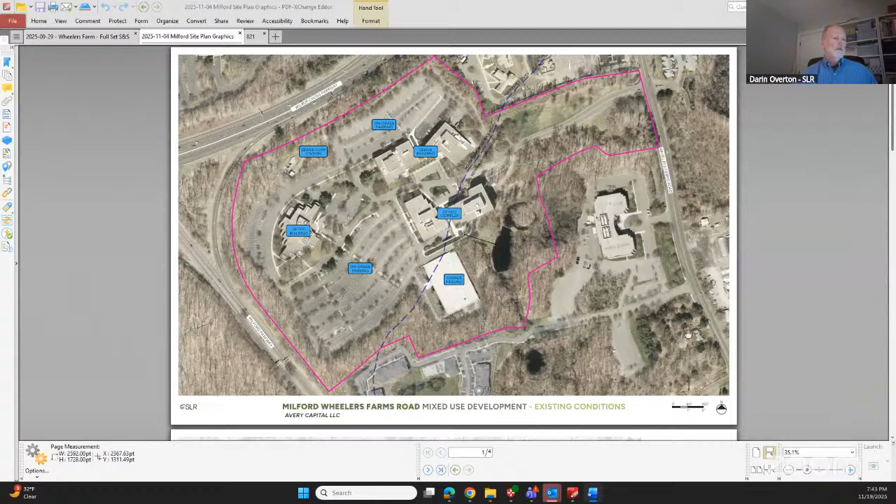corporate office park. So the next sheet I have is a proposed development rendering of the site, which shows the proposed changes to the development. It's a redevelopment of the office park into a mixed use with multifamily, residential, and age-targeted uses.

So we have a building here which replaces one of the office buildings. Actually, there's 2 office buildings here that are tied together by a corridor that have parking that utilizes the existing parking garage, which is proposed to remain. So this is the 150 age-targeted building that's proposed to replace those 2 office buildings that will be removed as

part of the project. And then over on the western side of the site, we have the proposed multifamily residential housing. And there's really kind of 2 quads to that development. So I'll zoom in a little bit here. We have 2 proposed L-shaped buildings that are 63 unit buildings. We have another 62 unit building.

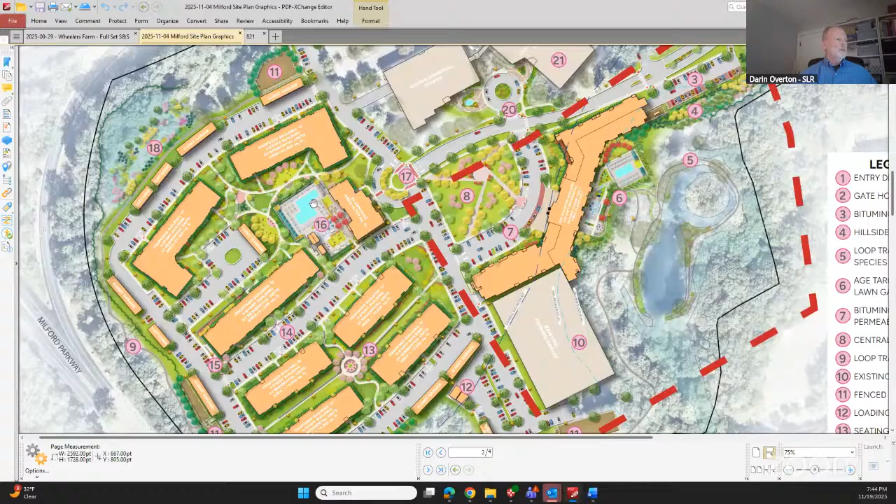And then there's a clubhouse that sort of closes in the quad. And then on the interior part of that quad, there's walkways. You can see the proposed pool and amenity spaces behind the clubhouse. The second quad to the south has 4 multifamily buildings. They're all 44 unit buildings.

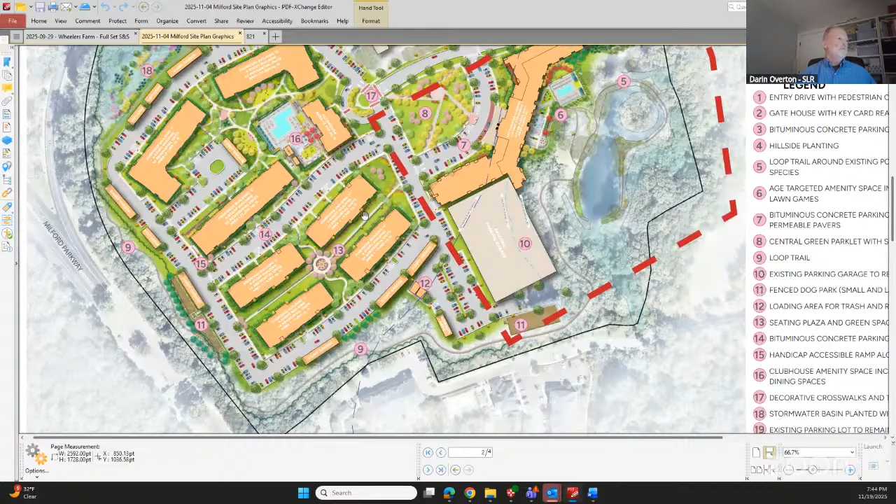And then there's kind of a smaller gathering space in the middle here with connected walkways to provide pedestrian access throughout both the multifamily and also connections throughout the site to the office buildings as well as the age-targeted building. Each of these has adjacent parking spaces that provide convenience for access for the new residents, as well as the use of the existing office buildings.

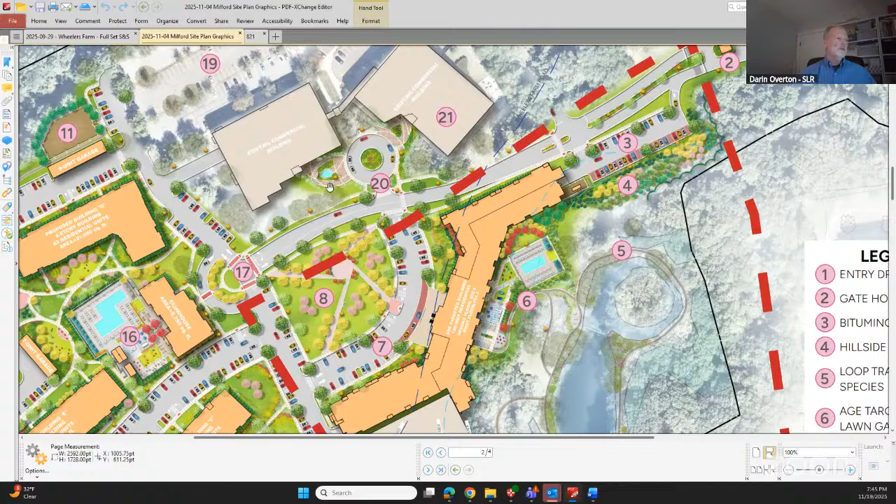As part of the 2 office buildings to remain over here in the northern part of the site, the northern parking field is remaining the same, essentially unchanged. We are providing some improvements to the access to provide vehicular access and drop off at the front door and some enhanced landscape treatments for the entrance to those 2 buildings.

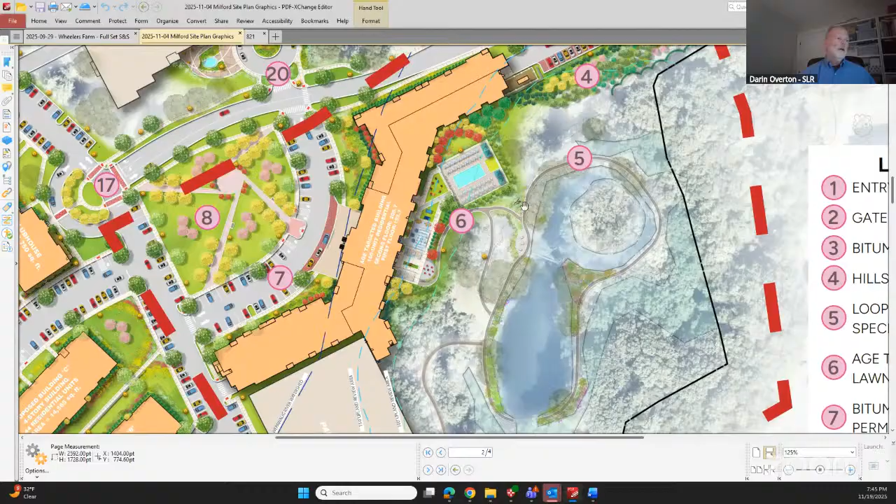The age-targeted building also has an amenity space on the back side of it. The amenity space also has a pool and several other outdoor eating and amenity spaces, and it overlooks the existing pond on the site, which has a trail system around it that exists, and we're going to enhance part of that as part of this project.

There's also a central green, this item 8 here in the middle, kind of a public space that ties all the uses together. There's also pedestrian connectivity through these areas with crosswalks to basically connect all the uses. There are a few dog parks that are proposed for the new residential uses. There's one over here, 11, another one here, and then another one here.

And those are connected by a nature trail that loops around the multifamily. It comes through the south side of the site and also connects in with the age-targeted building. And then there's pedestrian connections across the roadway network to the office buildings that are proposed to remain. So we have parking distributed around the site.

As part of our work, we did a shared parking study. We looked at the various peaks for the different uses, and we sought to not overpark this. Because the office building and the residential have different peaks, we sought to optimize the parking to provide the right amount of parking, not over or under park it.

And we believe what we've provided at 1,409 parking spaces with 126 potentially in deferred areas that we're not building at this point, we believe we've adequately provided parking and distributed it well throughout the site for each of the uses.

I'll just go over a couple more, really kind of engineering aspects of the plan, stormwater management and the S&E plan. And then I'll turn this over to Megan. For stormwater management, we've done a full hydrologic analysis of the site. We've looked at both watersheds. We've looked at trying to maintain the water where it goes now in those two watersheds.

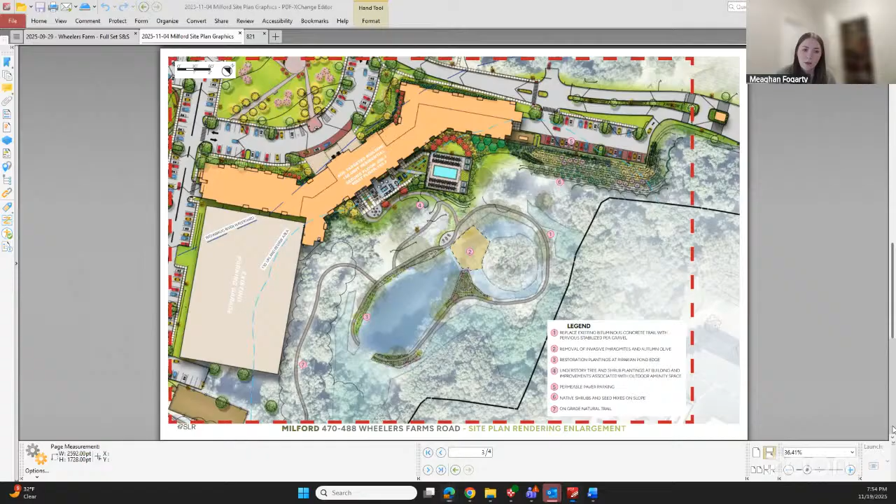Shifting now to the proposed activities and any potential impacts. We again want to emphasize that no direct wetland impacts are proposed. The regulated activities within the 150-foot upland review area comprise a little over 71,000 square feet. And that includes portions of the age-restricted building, as we see here, permeable parking, as well as grading and landscaping and the restoration activities around the detention pond itself.

The deteriorating paved pathway around the pond will be removed and replaced with stabilized pea gravel, which is a more permeable alternative that will serve to enhance infiltration around the pond. And we will also be removing invasive vegetation in and around the pond. As you can see in orange there, there's autumn olive, some pretty tall, dense stands of it around the periphery, as well as Phragmites australis inside the pond in that one polygon, sort of to the northeast there.

And in their place, we will be planting a variety of native wetland plugs and shrubs around the pond to create a more natural littoral shelf. In its existing conditions, the pond is primarily mowed lawn right up until the edge of water, limiting the functions and values the pond can provide. So we're looking to enhance that there and replace and promote with native vegetation any areas that the invasives will be removed.

As you can see in this graphic as well, there's a dashed red line where the age-restricted building and amenity space is proposed, and that represents the limits of the existing hardscape that encroaches within the 150-foot URA. And so as you can see, we tried to keep the hardscape of the design limited to that general footprint, and we're fairly successful. Everything beyond that, we use strategies such as the permeable paved parking spots, as well as a pretty heavily planted hillside upland area with a lot of native and wildlife food source producing shrubs, as well as a native seed mix in that area.

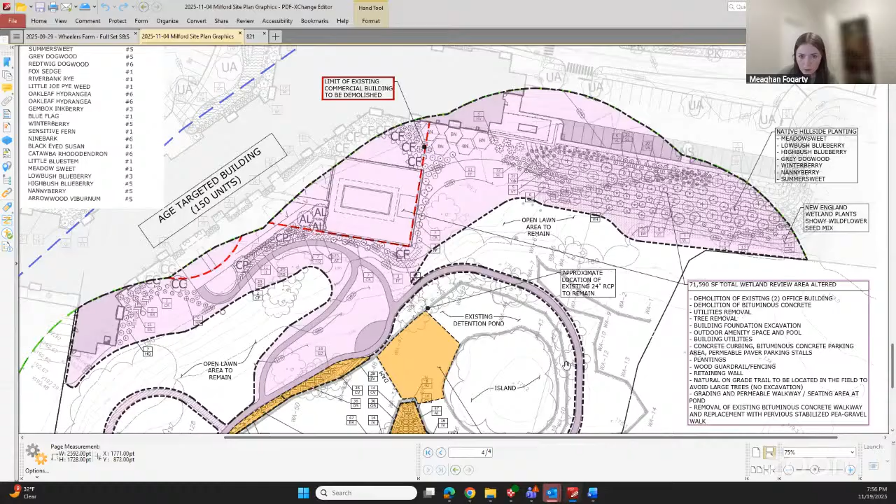And the trail, apart from the area that's encircled in the pond over to the west, the nature trail that Darin was speaking to, instead of a surface material such as pea gravel or pavement, we chose to keep that on grade and natural as possible. We talked about possibly having some non-dyed natural wood chips in areas where we might have to traverse a steep slope, because the trail will be field sited to avoid clearing of any large trees. So it might shift a little bit from the proposed condition you see there, just based on tree avoidance.

As Darin spoke to, the sediment erosion controls are in accordance with all applicable guidelines and will serve to protect water quality within the detention pond and adjacent wetlands during construction. And overall, the lack of proposed direct wetland impacts, the adherence to the general footprint of the existing development, and the mitigation activities proposed in the form of invasive vegetation removal, a diverse variety of pollinator-friendly upland and wetland plants, and that replacement of the paved pathway along the pond were really designed and are anticipated to enhance the long-term functions and values of this resource compared to its present conditions.

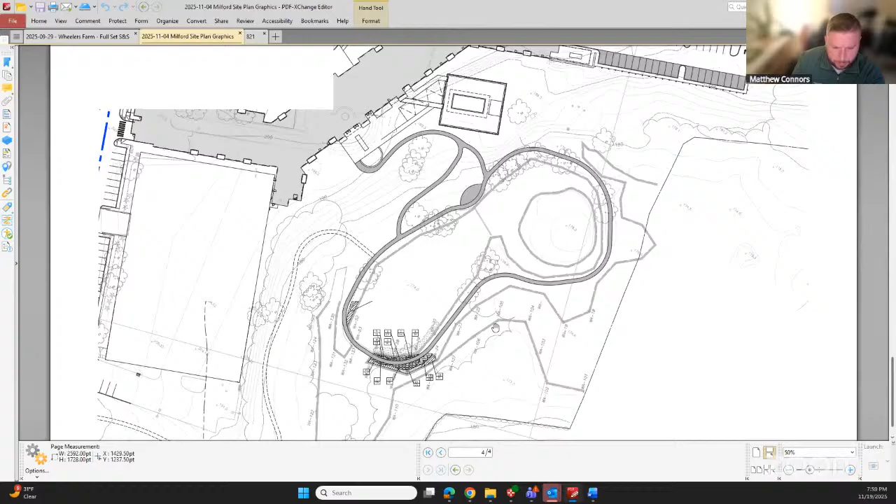Thank you, Mr. Chair. Through you, Mary Rose, is it possible just to emphasize, are there wetland flags? I didn't see any on the map. Are there actual wetland flags on this property? I couldn't see it. I just saw the upland review area marked. So those are the wetland flags? Through you, Mr. Chairman. The exact flags are not shown on this plan. They are on, if I can share, they are on figure 2.

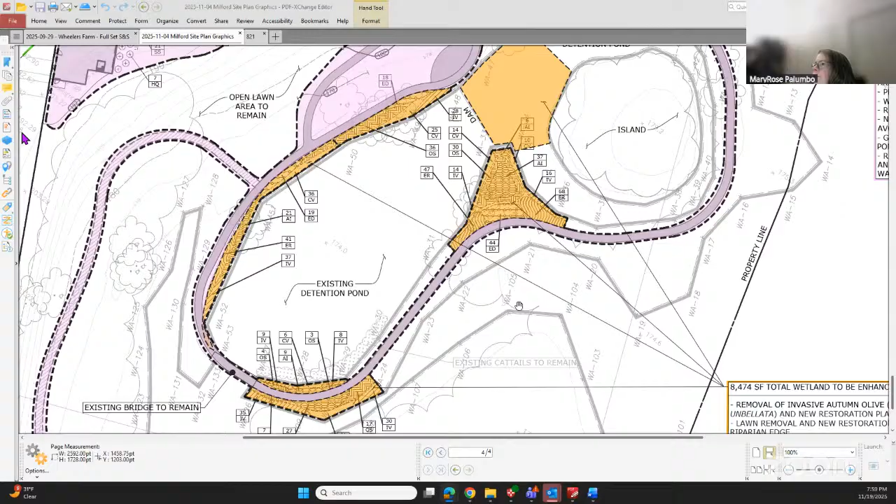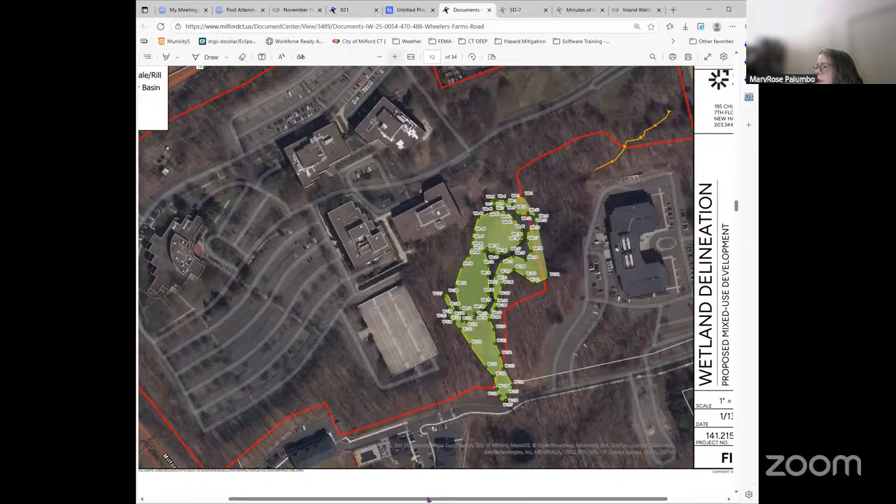Oh, there you go. Go in a little bit. Which is in your meeting packet. And they are on all the drawings in the meeting packet for this area, which is mostly sheet 5. When you're reviewing the drawings, sheet 5 is the majority of this area, and sheet 6 is the bottom corner of the parking deck and the little bottom of the wetland.

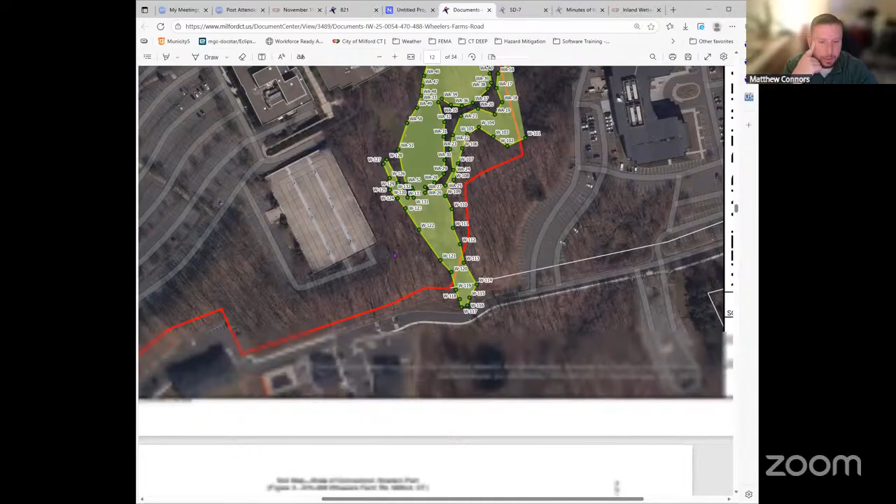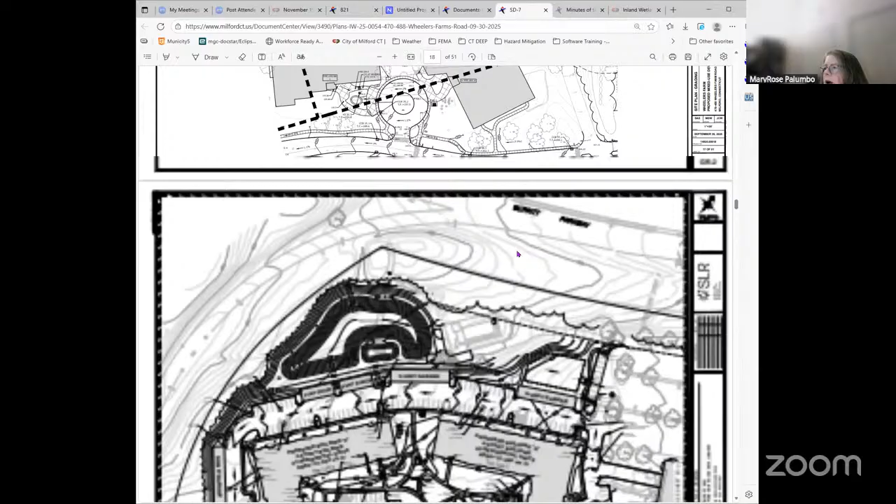And just relative to that question, I was just curious on the dog park. I saw that you guys are going to be using some sort of turf material. Can anybody speak to that and its potential, during storm events, to release any sort of microplastics that can enter the wetland? I'm not sure, Mr. O'Leary, if you have an overall plan. The dog parks are proximal to the multi-family units. The south one I was curious about. Okay. One adjacent to the parking garage.

So the parking garage, keep going down a little bit more. A little more. One more. There it is. I think you need to go up one sheet. Sorry. There it is. The dog park, it's not shown on this sheet, but it would be just to the south of where the cursor is. I don't know why it's not reflected on this sheet. It's in that area. So, yes, correct. Yeah, I had the maps pulled up, I just had trouble orienting that.

Is that in the review area? No, it's not within the review area. Okay. It's probably 300 to 400 feet out of the review area, I believe. Darren, if you could verify that during the conversations. Go ahead, Matt, with your next question. Okay. Thank you. Appreciate it.

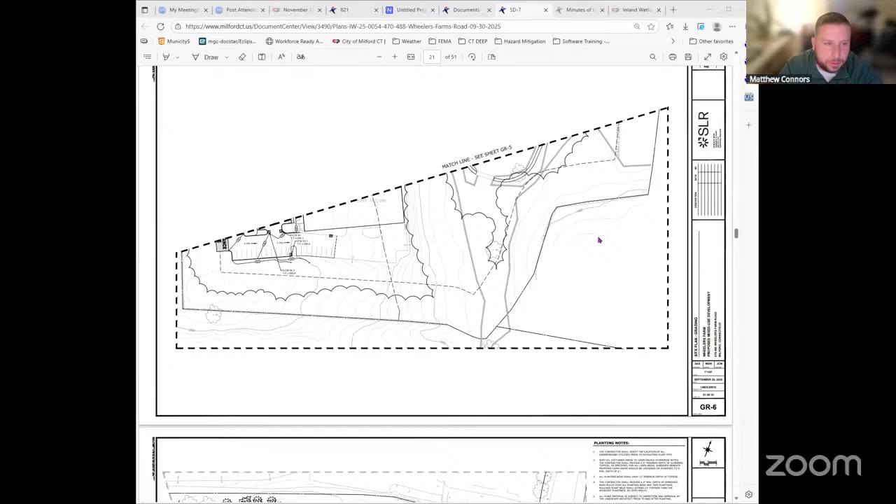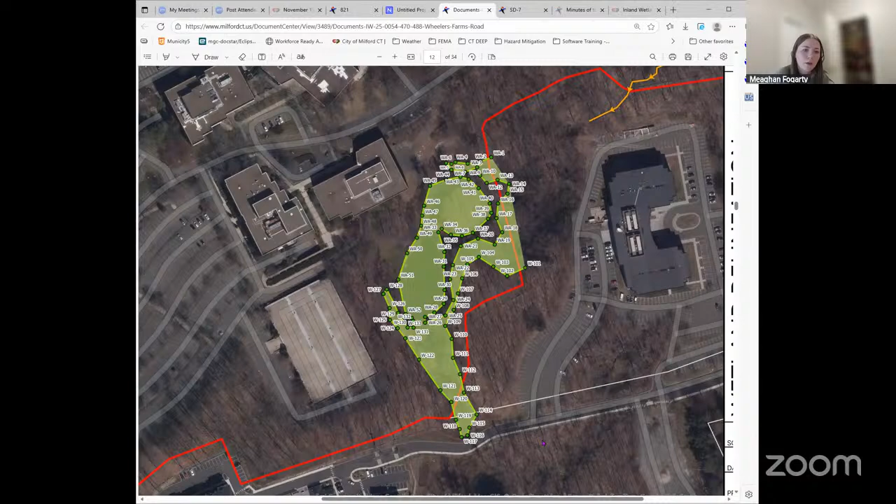My next question was in regards to the Phragmites removal. I just wanted to know what process you guys were going to use. Are you going to mow it back? I know it's really hard to remove Phragmites because of their root systems and how they grow back. Are you going to be using herbicides as well? Yep, that's correct. A wetland approved herbicide is our typical treatment method for Phragmites. It does not respond well to manual treatment, even if repeated over a number of years. So a wetland approved herbicide is the standard there, and that's what is proposed.

And is there mowing as well, or is it strictly the wetland approved herbicide? We don't have an application method included at this point, but from my experience, the Phragmites is located within the water itself, so you wouldn't be able to get a mower in there. But there is a technique called snip and drip, where you cut the stalks individually and apply herbicide down into the stalks, and that's proven very effective and also limits any risk of overspray or accidental treatment of adjacent native vegetation. Yeah, I know sometimes they use amphibious vehicles as mowers for that stuff.

And then in regards to that pond, I know you mentioned it is a detention pond. Not all the water, obviously, but a lot of the water in that pond is coming from the site? Correct. Is there any sort of filtration happening to that water before it's entering that pond as it is right now? So, I think Darren could speak to the actual utility of it. But in terms of the detention area, it's actually split.

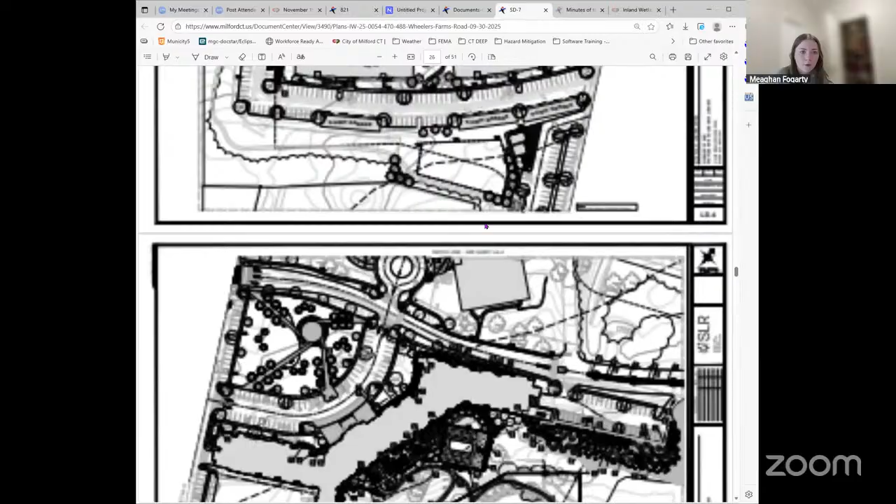Correct. Not that we are aware of. I believe we were looking to dig up some records of the original construction to see. We do know that pipe comes from the parking garage, which is going to be maintained as part of the proposed conditions.

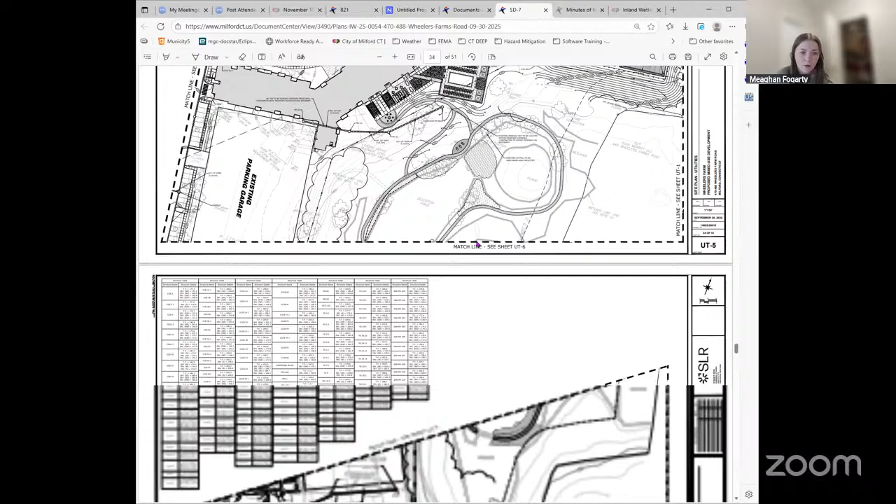And the other thing I will mention is that the littoral shelf plantings that are proposed will inherently provide some level of treatment, as this is intended to be a stormwater basin in its original design. And as such, vegetation along the perimeter goes a long way in sediment and nutrient capture.

So I can add to that a little bit. And Meaghan, I think you're exactly right. In my field walks out there in the summer, that upper part of the basin with the island in it was virtually dry other than right at the weir wall. But there was still a beautiful permanent pool on the western side of the basin, the downstream side. So I think that upper one is a water quality basin that's not intended to have a permanent pool. It's supposed to fill up and appears to infiltrate somewhat.

Along the northern edge of that, there's a 24-inch storm drainage pipe that comes into that upper lobe of the basin with the island in it. That pipe comes from the western side of where the age-targeted building or the existing office building is, and runs over towards the parking garage. We went through all the plans in the facility to try and better understand how that drainage system connects.

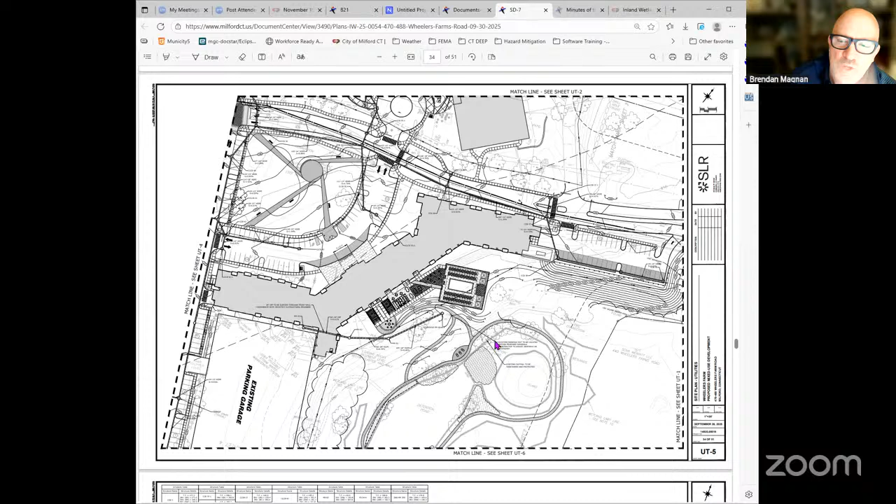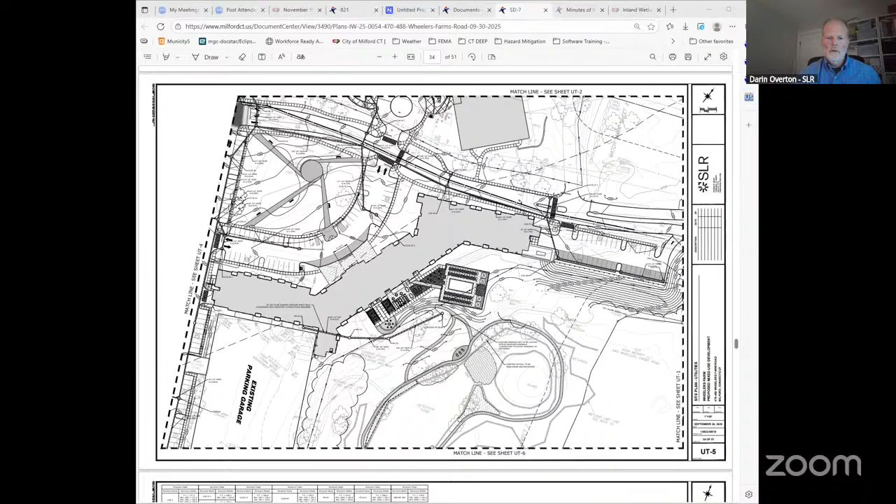Excuse me, Mr. Overton, can you show what you're talking about? Can you take control of the screen and show? Sorry, I want to follow what you're saying and I'm not able to do that. If you can bring up the visual that you had before and just talk us through it, that would be helpful. Absolutely. Let me know when you can see it. Yep.

So this is the upper lobe of the basin, and there's an upland vegetated island in the middle of it. So there's kind of, as Meaghan had mentioned, a moat around here. There's a concrete weir that goes across here that separates the two portions of the basin. As part of the walking path, there's a wooden bridge that goes over the outlet where I believe there's another weir that controls the permanent pool elevation in here.

So this part of the basin, even in midsummer, had a permanent pool. This part of it was mostly dry, other than the area where the Phragmites was. There was still some water pooling there. Just above the Phragmites, right about where my cursor is now, there's a 24-inch stormwater pipe that enters this part of the basin. That comes up to a manhole in this area and then runs west out through the age-targeted building and comes into the parking garage.

So existing parking around the perimeter of the parking garage on the south and west side ties into that drainage system, as well as the parking garage. And then there's a series of manholes in the lower level of the garage. We believe there's some sort of stormwater management below the lower level of the parking garage; it may be a detention or water quality structure.

And then it comes out and discharges into here, into what we believe is a water quality part of the stormwater basin as it was designed, which then overflows into the permanent pool and then discharges to the wetland. And you can see, as Meaghan mentioned, the flagged wetland actually wraps around the east side, and then the pond itself has a bit of a berm around here.

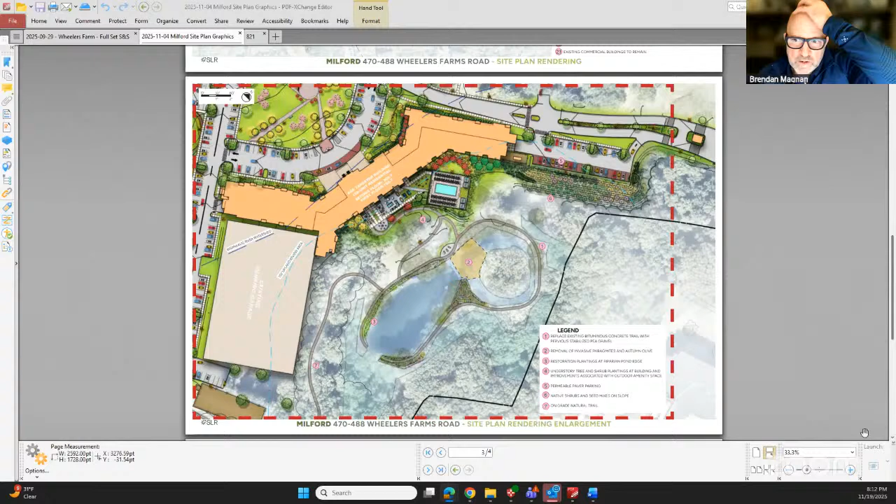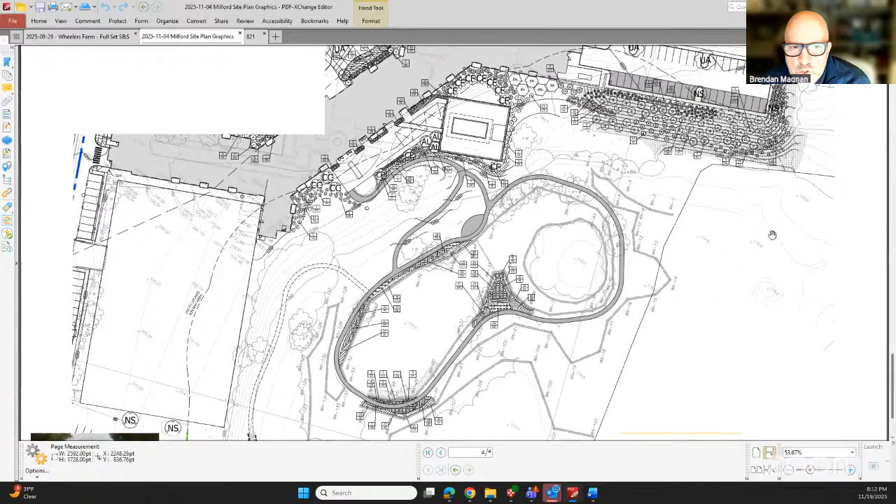And a follow-up question for Ms. Fogarty. On the other drawing where there was the hashing, the drawing you had up before, Mr. Overton. Yes, this one. Can you make that a little bigger just to see the text box on the right? Can you just talk about what's in that box, Ms. Fogarty, in relation to the wetlands? I see a headline that says review area altered. So what do you mean by altered? And can you just take us through the essential stuff? Sure. I just want to make sure I'm clear.

Yeah, absolutely. So the text box there is referring to all of the areas shaded in pink on this graphic, and those areas are all of the limits of development, limits of work, essentially within the 150-foot upland review area. So to say altered, it's the same as anywhere we have the upland review area disturbance or impact. So nothing new there.

But to go through the things that are listed in that text box, we have the existing buildings being demolished, as you can see in that red dash line, that's the limit of those within the 150-foot upland review area. The removal of the concrete, which is along the pathway, and some areas near the building as well. Utilities removal, some pretty minor tree clearing, mostly along that hillside planting area where we replaced it with a dense variety of native shrubs, one tree species to restore that area, as well as a seed mix.

And then we have the building foundation excavation, amenity space and pool, utilities, curbing, concrete parking, permeable parking, which you can see is hatched in that northeastern portion. Those are just associated with the age-targeted building redevelopment. But it's important to mention that the hardscape, the amenity area itself, is pretty well limited to the existing footprint of the encroachment from the existing office park. The retaining wall was used to limit additional encroachment within the upland review area. And the natural on-grade trail will be field located to avoid large trees.

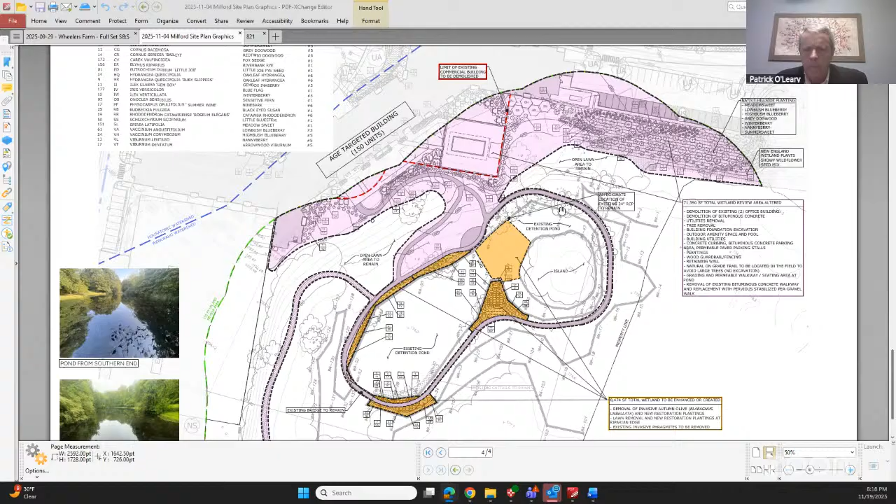This does show the location of that 24-inch discharge right on the edge of the Phragmites and where that pipe comes in. So there's a pipe and existing manhole that comes in here. So that location is identified in this plan. Thank you. Thank you.

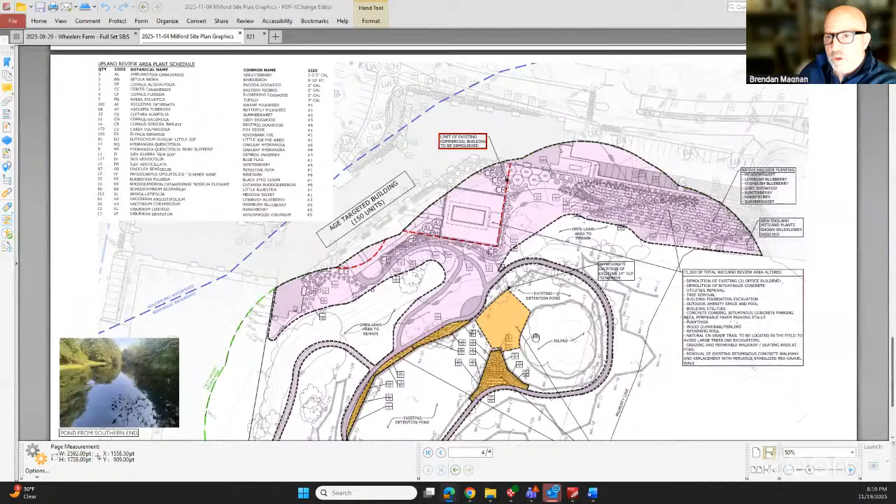Other questions from the agency? Through you, Mr. Chair. Yes, Mr. Gradwell. I have a couple questions. I think Mr. Overton may have explained the storm drainage system that discharges to the wetland and upland review area, and he mentioned that they're not proposing any improvements to that storm drainage system at all, and just going to let it kind of drain to the wetland as it drains today.

I believe this is a pretty big redevelopment site. I would think they would consider some sort of stormwater management improvements to the water that drains to that wetland and upland review area. And I would hope they maybe consider that, because it is a redevelopment. It is a pretty good sized project, and we don't have many opportunities to improve the water quality going to a wetland or upland review area very often here.

Another question in and around upland review area and erosion and sediment control measures. Just based on this plan right now, there's a lot of area that's going to be disturbed in the upland review area, say to the west of that wetland and resource. Maybe Mr. Overton can go over that erosion sediment control plan with respect to this area and our resources in and around this area in a little more detail.

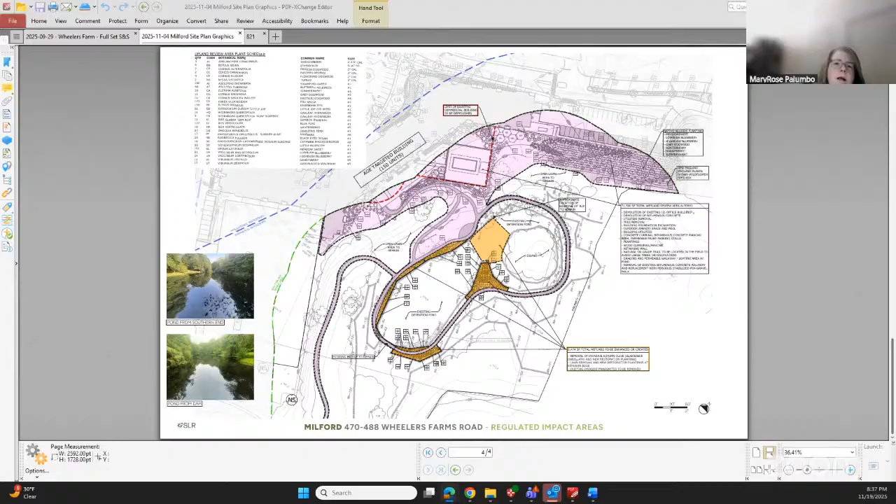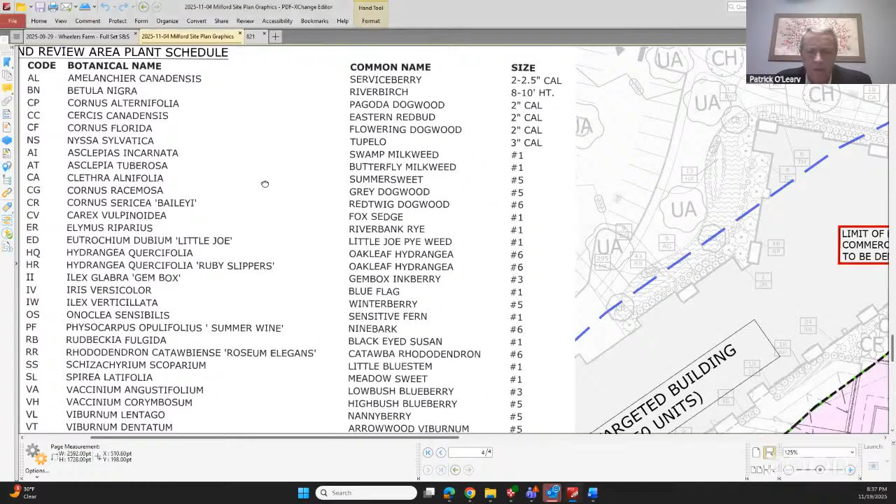Through you, I can share with you placards that other sites have put up that are not like everybody stay on the trail so much as look at this resource. Here's the kinds of things you'll see in this resource. Ms. Fogarty mentioned pollinator plantings. Milford's now on the pollinator pathway. You could get some pollinator pathway signs, things like that, that would lead people to not destroy the environment as much as enjoy it. It's a very good suggestion. Thank you very much. And we will incorporate that.

Yeah, there's actually a resource, and MaryRose has a couple resources, but I'm just looking at one of my pictures from the wetlands conference we went to Saturday. And there's a really intentional sign that says, let it grow, do not mow, and then it educates the public about the benefits, right? Cleans water, stabilizes the bank, filters pollutants. This may not be the right fit, but it's along those lines. Understood.

Okay. Mr. Field, do you have any questions, or Mr. Bedeker? Everyone has basically beat me to the punch. They all had good questions. The only thing, it's just an idea, but it's just feedback from the other commissioners: if they're worried about around the pond, just put a split rail fence up. Yeah, I love that.

Yeah, I don't have concerns necessarily that would lead me to suggest there should be a rail fence. My underlying concern is more, are there any factors during the construction that would destabilize it? But it sounds like the testimony is to the contrary, that that's all being taken care of, from what I can tell.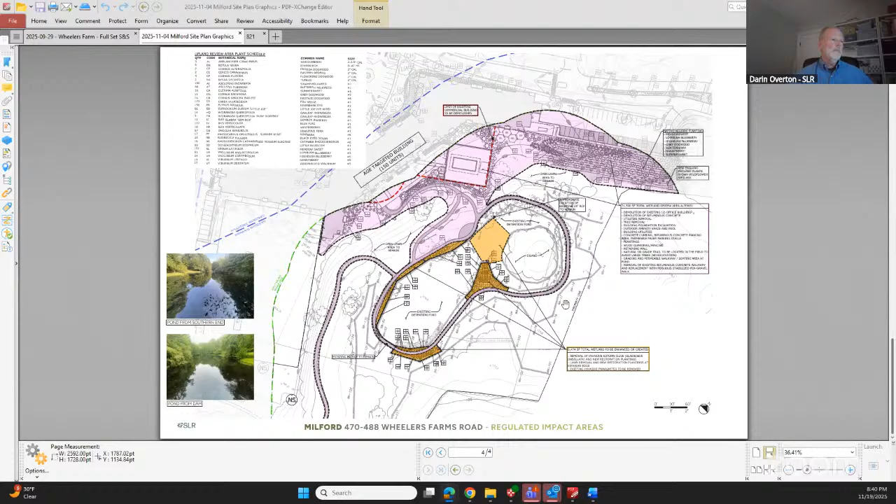So we do, as part of our due diligence, look at the FEMA mapping, and anytime you have a water feature like this that's connected to a larger watershed that goes off site, we want to think about resiliency and avoiding flooding in the buildings or any critical resources. I think all the amenities that we're proposing around the pond, if this whole area were to flood, there really wouldn't be much, if any, impact to it. So I think what we've designed is pretty resilient.

I forgot to mention, but this watershed extends up to the base of the slope up around Wheeler's Farm Road in this wooded area here. So there isn't much upstream watershed to this, and the wetland is extremely flat through this area. But there is a catch basin on Wheeler's Farm Road and a pair of catch basins at the entrance drive with a discharge over in this area that discharges into the wooded area that then leads into the upper part. So that's the upper part of the watershed. It really starts at that stormwater discharge and then drains through this wooded wetland area toward the pond.

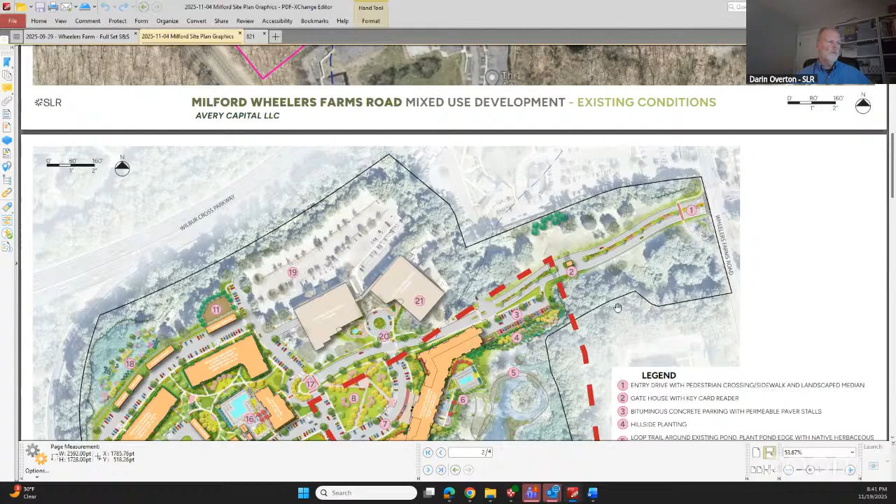So I forgot about that, and I apologize, but I did want to mention that. This is another part of the system that's essentially remaining unchanged, other than the town engineer has asked, because there's no formal drainage easement there, for us to provide a drainage easement. But there is very limited watershed through here, where even extreme rainfall events could cause flooding problems, other than within the pond itself, I believe.

Okay. Thank you for that. Appreciate that. And that does lead to another question that Mr. Jim Connors would normally ask. He's probably thinking about it. Snow shelves. Are there any intentional snow shelves in the area, like in parking area 3, where those pervious parking spots are going to be designed? Are you planning on putting any snow shelves in that area? Doesn't seem like it, but we just always typically look at those things.

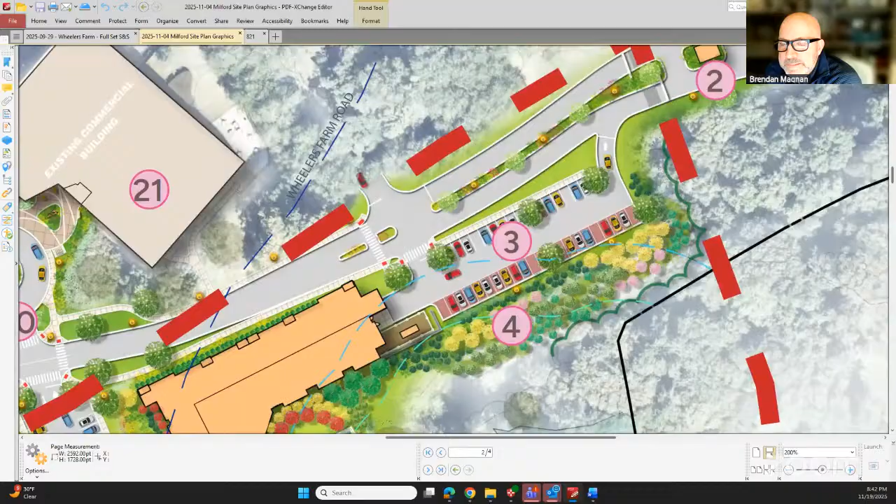So the snow shelf would likely be at the end here. We expect they're going to push the snow down towards this end of the parking area. It's just kind of logical that you push it that way. And then there is another kind of grass island here. And in pushing it out of the parking lot, they would have to clear the walkway along here as well.

There is somewhat of a flat shelf. It's probably only 4 feet along the edge here to accommodate the lighting that's proposed before the vegetated slope. So there is some ability to store along the very top of the slope there. But we don't want them pushing the snow too much into the vegetation there. It's probably a pretty limited area.

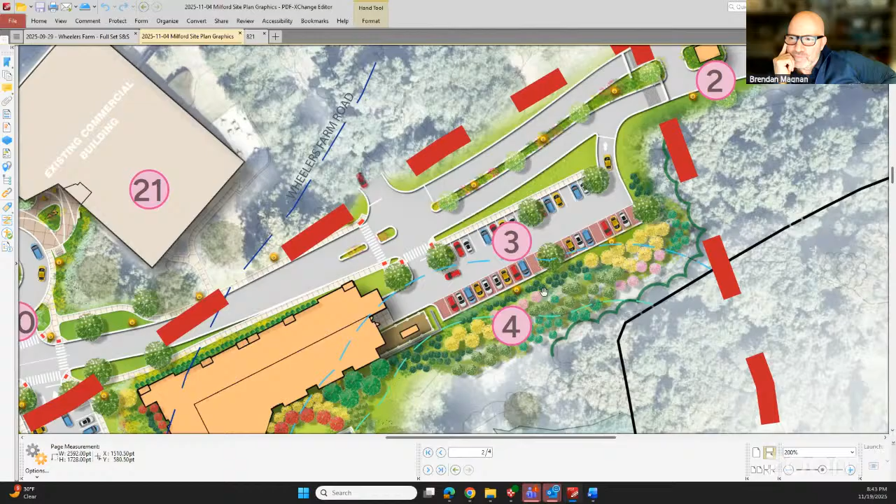Great. Mr. Connors, you're on mute. If you want to say something, you're on mute. Jim, you're on mute. You're on mute. Come on, Jim.

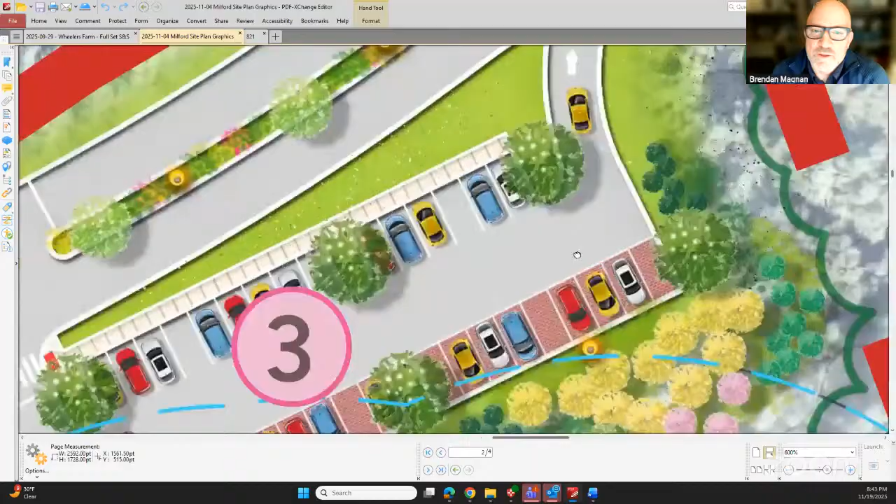There you go. Okay. I said, it shows vegetation at the end of the area where you want to push the snow. And those plants, whatever they are, are not going to like snow being piled on them. Yeah, we would recommend that you don't create a snow shelf there, is kind of what I'm suggesting. And do you agree? You got to put it somewhere, and that's probably the only logical place because they got plantings all along it. And that's the way you would plow the snow. You would push it there.

Yeah, to the end, but not like where number 4 is. Push it up the other way, right? No, you push it, looking at the picture, to the right of 3. You know, straight off the parking lot from the building, and there's where your hand is. That's the shrubbery or whatever. Yeah. Don't plant it there. Yes, we might want to relocate those. We'll rethink that. Yeah, we would appreciate that in the proximity of the wetlands. Thank you.

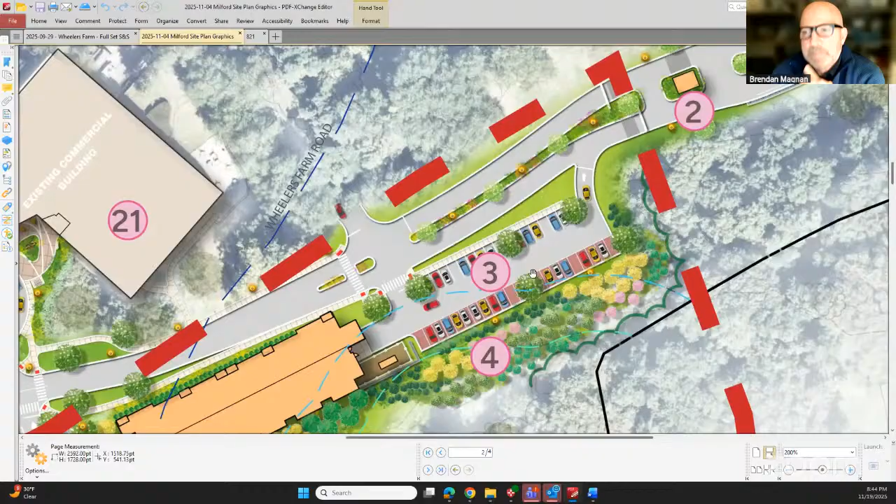Okay, so we've obviously covered a lot of territory tonight. If there's any more questions, we could take them now, but if not, this evening we're not going to make a decision because we are waiting on the response to the engineering and Mary Rose's review. So it would be my suggestion that we take no action until the next meeting.

Mary Rose did remind me that if for some reason we don't make a decision on this at the next meeting on December 3rd, we will need to ask the applicant to extend because our 65-day window will close the week after. And we'll be happy to accommodate that, Mr. Chairman.

And in the interim between now and the next meeting, we'll take a very, very serious look at all the comments. I believe we can accommodate some additional stormwater management techniques for the line coming out of the garage. We'll take a very hard review of all the soil erosion control measures and potentially fortify them where commissioners have suggested, understanding the importance of protecting the wetlands there.

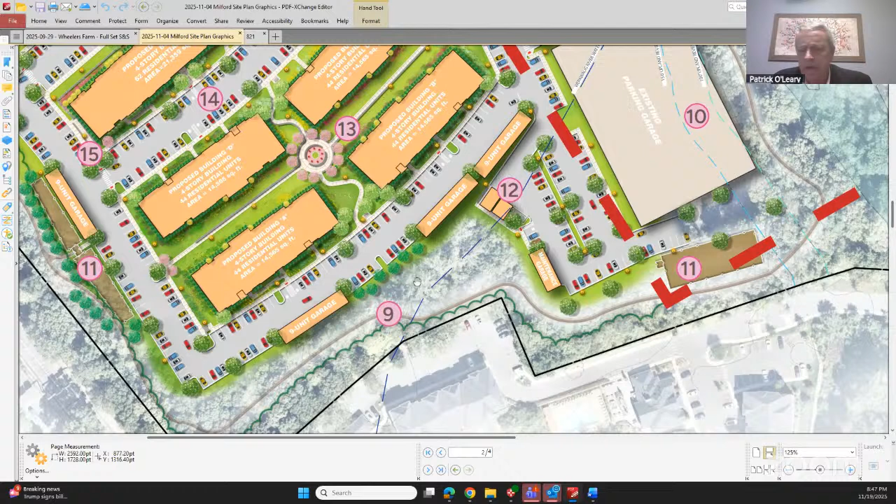Through the chair, yes, they are, sir. Where are you going to put the snow there? Snow is going to be pushed beyond the garages, and we have more than adequate area if you look behind the garages to store snow. It's going to be pushed throughout the perimeter of the site. Not behind the garage, but if you look at the surface parking between the garages, there's more than adequate area there to get the snow off the paved areas and out into the edge of the wood lines there. Do you enter the garages from the brown area or the street area? From the street area. Okay. Mhm.

It'll be a complicated snow plowing project. Oh, yeah. No doubt.

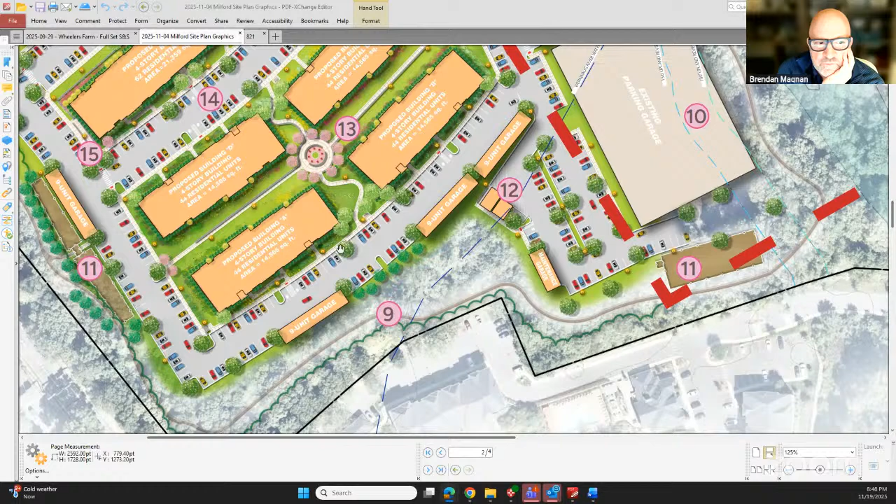Okay, back to you, Mr. O'Leary. Appreciate your attentive team. Appreciate all the answers and responses you've given, and your willingness to consider all of the concerns that we've addressed. Thank you. Thank you for your time this evening. We look forward to working with you on this very exciting project. Thank you again, Mr. Chairman and Commissioners. Thank you. Can you forward me your deck from this evening so that I can add that to the documents in case the commissioners want to review it before the next meeting? Of course, it'll arrive in your inbox shortly.

Thank you, dear. And just before you leave, sorry, through you, Mr. Chair, Mr. O'Leary, if you could just add to that list the long-term maintenance. Oh, yes. Appreciate it. I apologize, I missed that, but that will absolutely be added. All good. Thank you. Great. Thanks for bringing the experts. We appreciate you. Okay, hearing no other questions on this matter, we're going to move on to the next agenda item on the meeting. Thank you all.

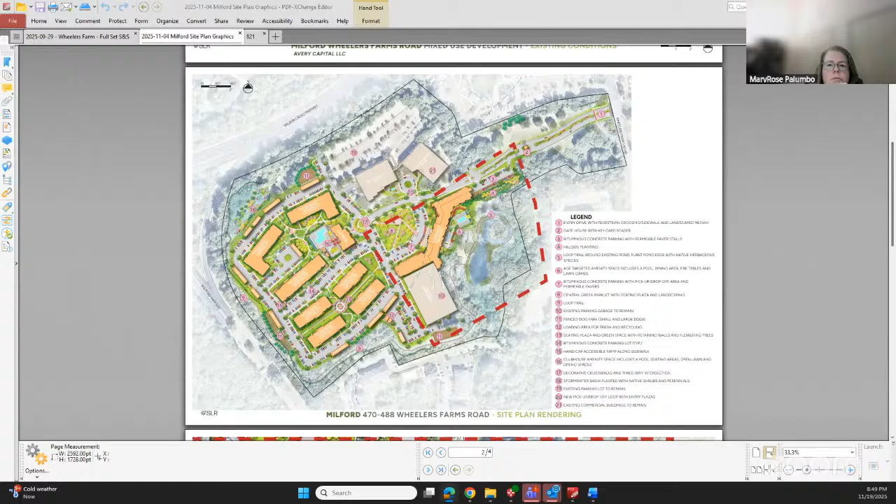Okay, what do we got next? Through you. We inadvertently left new business on there. There is no new business. Great. Thank you, Mary Rose. Consideration of the minutes. Do we have a motion to accept those as presented? I'll make it. We have a motion. We have a second. Second it, Mr. Chair. Mr. Field, thank you. Any discussion on the motion? Okay, hearing none. Lisa, roll call vote, please.

Dan Bedecker, Aye. Renji Bahav, Aye. Brian Black, Aye. Jim Connors, Aye. Matthew Connors, Abstain. Buddy Field, Aye. Ray Gradwell, Aye. Brendan Magnan. Aye. Motion carries. Thank you, Lisa. Yeah. Mary Rose, staff report.

All right. We attended the CACIWC meeting last Saturday. Chairman Magnan, Commissioners Bahav, Matt Connors, and Ray Gradwell were with us, as well as members of the Conservation Commission. Keynote speakers talked about climate change, which is, I'm glad we rolled that into the discussion this evening, and its impacts on vegetation and sea level rise. And there's also a working group on riparian buffers where they're considering new legislation. Representative Mary Mushinsky is leading the working group. They're considering legislation to require a size. They haven't decided on the width of a required no variance buffer along water courses and waterways.